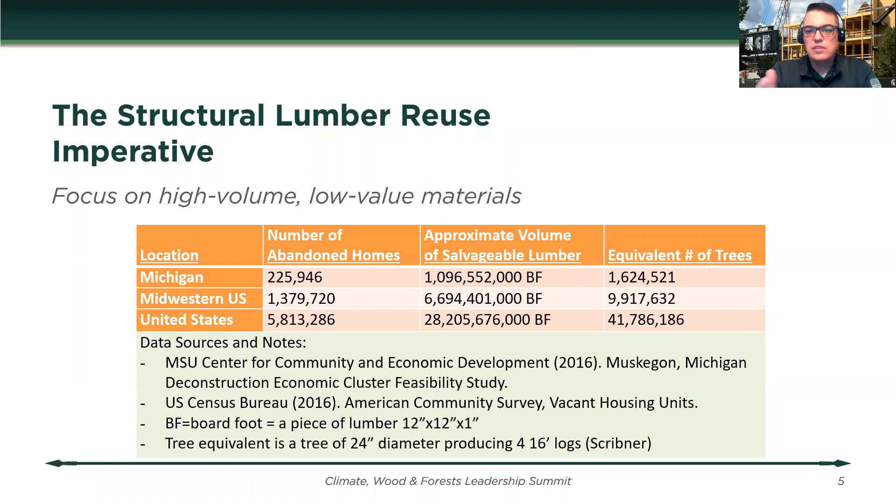So if we go back to that original table and say, okay, so we have all these homes, we have all this lumber that's just sort of sitting there that, mostly when these homes get dealt with, they're demolished and the material is landfilled. Let's look at what this amount of lumber actually equates to in more practical terms. So that 1.1 billion board feet of lumber in Michigan is functionally the equivalent of about 219 million end tables, 11 million dining room tables, 5.4 million picnic tables. And so I put these numbers there only to really sort of expose the scale of the problem. This is just the Michigan numbers.

Furniture manufacturing is something that we commonly see as a proposed higher value use for this dimensional lumber that is left behind in these homes that could be salvaged. But even if we started looking at furniture use as kind of the most appropriate or the highest and best use of this material, we're talking about furniture production that's on major league industrial scales. And really, again, the reality of how much of this can be made and how much of this can be sold starts to become questionable if we want to treat all of these abandoned structures in some way and capture that material and put it into productive reuse.

So we started thinking about industrial scale uses that would consume more of this lumber and consume it in a different way, sort of a non-end user based way. So we looked at mass timber buildings that have been put up across North America, and we said, okay, what if we could make mass timber out of this material? How many such buildings could we build? And so we looked at the Brock Commons, which is a dormitory at the University of British Columbia in Vancouver, 18 stories of timber. So if we took all of that material, turned it into 100% salvaged content cross-laminated timber and glulam, you could put up 644 Brock Commons projects.

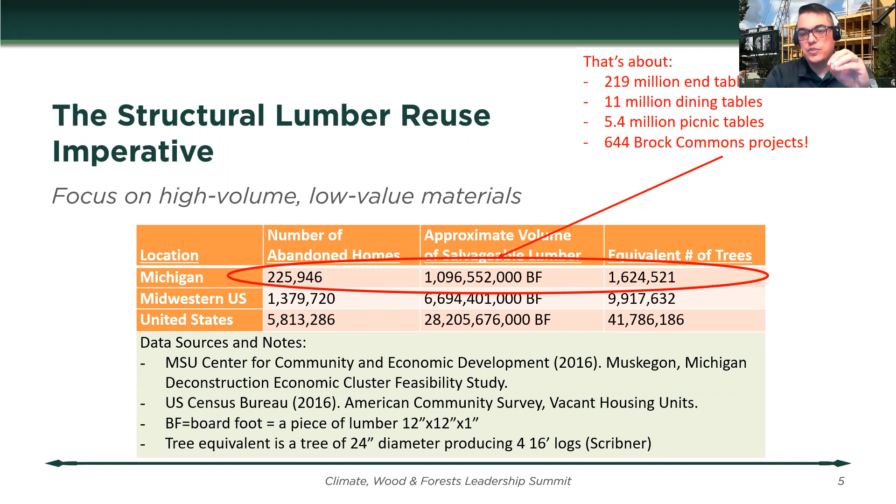If you mix virgin material with salvage source to make CLT and glulam, that number goes up, right? Maybe it goes up again by another half or another 2/3, depending on the fraction of virgin timber that we use. So this was really the moment where we said, okay, we need to think differently about how to handle this material and where it can go.

But there are significant challenges to reuse of this salvage structural lumber. First being code acceptance. None of the lumber grading agencies recognize salvaged lumber in any of their grading standards. There has been some academic and industry work that looks at what can be done with salvaged lumber and how does it grade out. And about 10, 12 years ago, there was a paper put out that said, well, if we look at the mechanical properties of salvaged lumber, they're pretty good.

So if you take a stick of salvaged lumber and it doesn't have a grade stamp on it, or you don't wish to get it regraded for future structural use, we would just downgrade it one grade on the visual grading scale. So if it graded out as a number 1 visually, then you would grade it as a number 2. So there was some move to try to get this material accepted into code, but save for some academic work, we haven't seen much come of that, except in Oregon.

Oregon has now allowed the reuse of salvaged lumber in their residential code. The limitation on what's been done in Oregon, unfortunately, is that it's only related to Doug fir and larch. And again, per what's in the code, you can take salvage Doug fir larch and just regrade it as a number 2. So again, it's usable for construction purposes, and it's usable potentially to be made into higher end products. But we're just talking about that Doug fir larch species group. So that's pretty silent on what's going on in eastern and southern species right now.

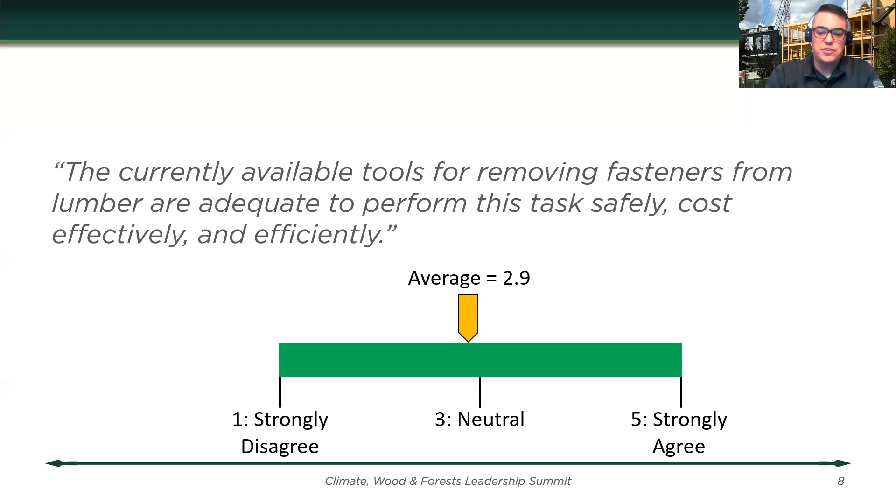And so our group said, well, this was sort of a resounding meh type of an answer, that nobody feels really strongly one way or another about currently available tools for helping to harvest and salvage and prep this material. And when we looked at 2 case study homes just here in Lansing, pretty similar homes, the one on the left was demolished, the one on the right was deconstructed. What we find is that you can demolish a house and fill the foundation in with about 40 worker hours. And that took about a day and a half of total time.

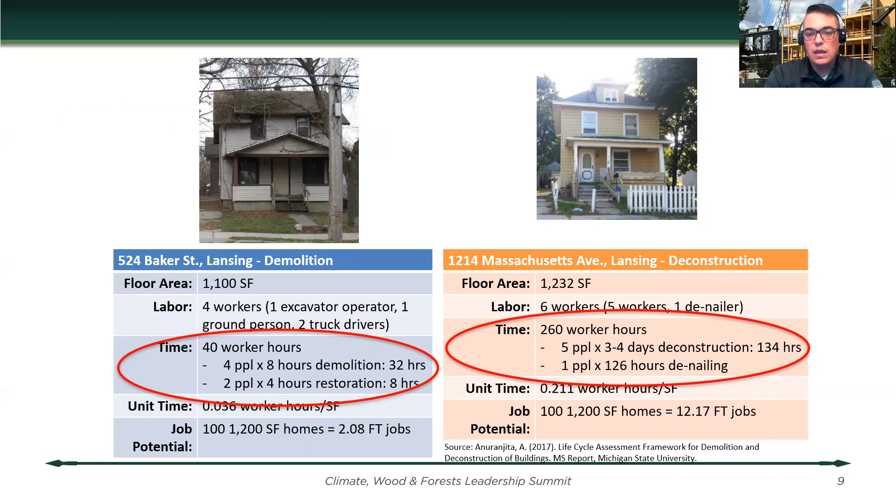But if you deconstruct a home of similar size, you're talking about 260 worker hours, basically half of which goes into the physical deconstruction, the physical removal of the structure. And then about another half of those hours is spent denailing. So just getting nails and fasteners out of the wood so that it's prepped for reuse. So this becomes a major inefficiency, a major bottleneck in the recovery process of the material before we even get into talking about supply chain and things like that.

The other issue that frankly has been hampering salvage lumber reuse has been the cost of the material by the time you go through all of this handling and all of this prep process. We did a little bit of back of the envelope calculation and found that salvage lumber costs about $833 per 1,000 board feet, and that's just to harvest it, so to collect it from the homes where it exists, and then to transport it to some point of remanufacture or reuse.

So if there's remanufacturing, that cost continues to go up from that point. If we look at the normal pricing for virgin material, and I put normal in quotes because we know that wood prices have been anything but normal since COVID-19 hit. But normally in Michigan, stumpage for softwood species is going for about $161 per 1,000 board feet. And then random length lumber futures in the Great Lakes states are going for about $457 per thousand.

So that 833 number, which is really just the harvesting, it's not any further prep. That number has just been a non-starter for a lot of different actors that are in this system, and leads to the further downplaying or the further restriction on use of this material.

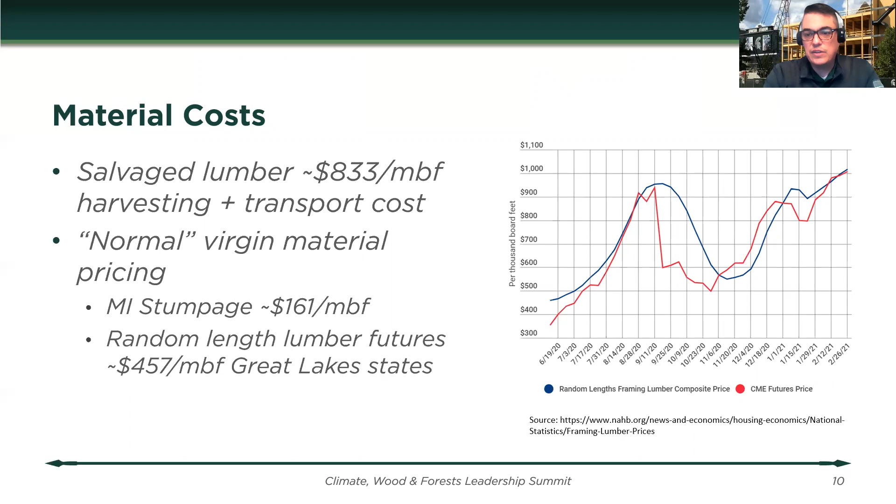But if we look at the lumber futures cost chart that we've seen in the U.S. over about the last 9 months, we know that there was a big spike last fall in lumber prices, and we're seeing that spike happening again as of late last month, with lumber prices pushing above $1,000 per thousand board feet.

So if we now start to think about where the pricing is going and how pricing is behaving on softwood lumber, maybe we can start to think about salvage material as a way to dampen some of these big swings in these markets. And so salvage supply becomes almost like a faucet that can be turned on, material that can be brought into the market to sort of dampen some of these price effects, because frankly, these prices are having a rather chilling effect on the home building industry, right.

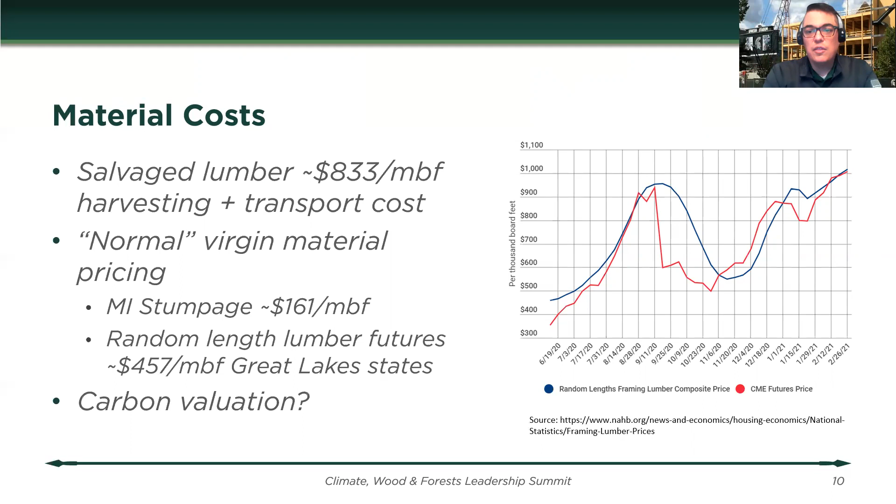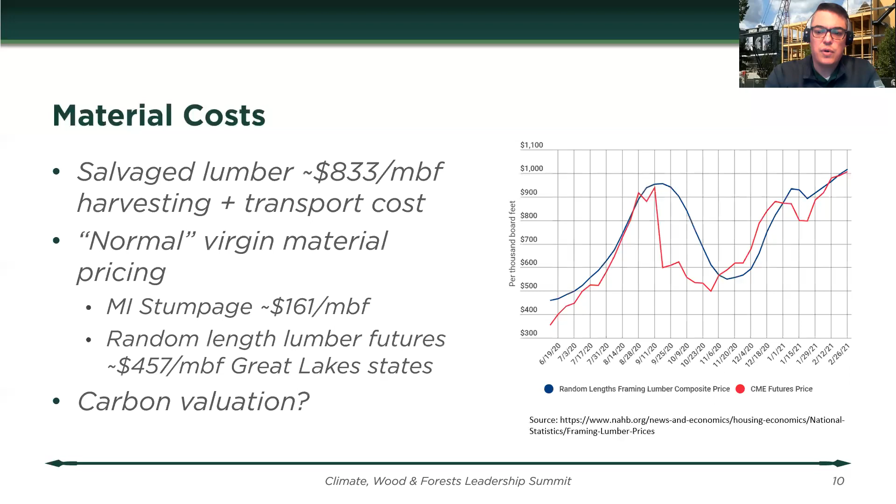The other piece that this so far has ignored is whether or not there's carbon valuation that can be attached to these materials. So if we start thinking about salvaged lumber and moving salvaged lumber through these higher use value chains, where we're moving them into long-lived wood products, now you're going to be storing carbon in those long-lived wood products for a long period of time as well. If we got into some sort of carbon regulatory scenario, carbon credit trading scenario, there may be additional value for this material to again offset some of those higher preparation costs for the material.

So we've done some work at MSU towards solving some of these challenges that were raised. The first is that we've been looking at mechanical properties of southern and eastern spruce pine fir species. So we've been taking some material from some homes that were deconstructed in Michigan. And again, it was primarily southern and eastern species. We've just been grouping it because of the mix that we've been getting into the SPF category.

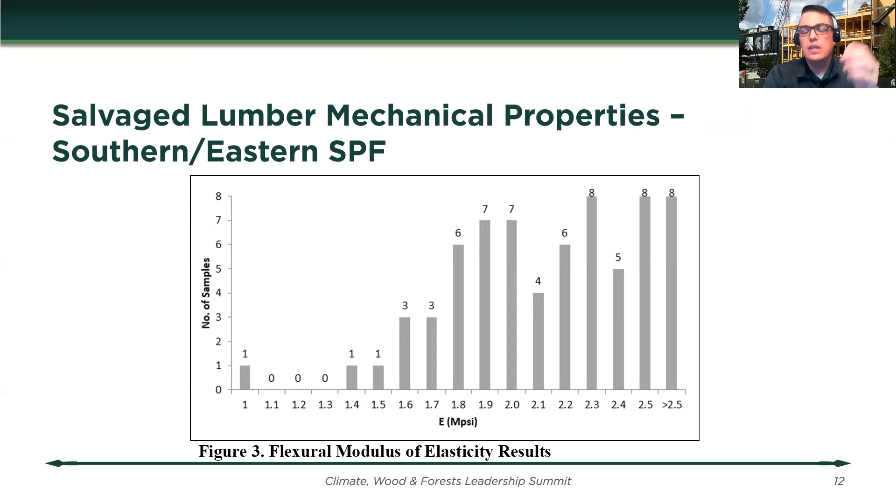And you can see here that based on modulus of elasticity, where normally you're looking for numbers somewhere in the 1.2, 1.3 million to look at what might grade out reasonably well for future use as construction lumber, you can see that in this group of I think 68 samples, really 67 have hit that mark. One sample did not. So from the first pass, we looked at our data and we said, this material, there's something to it in terms of its suitability for future use in these higher value applications.

And then we looked at specifically the entry grades for making CLT and for glulam. And we found that in 5 of the 6 commonly encountered entry grades for CLT, over 90% of our samples that we've run pass to be used as feedstock for manufacturing CLT.

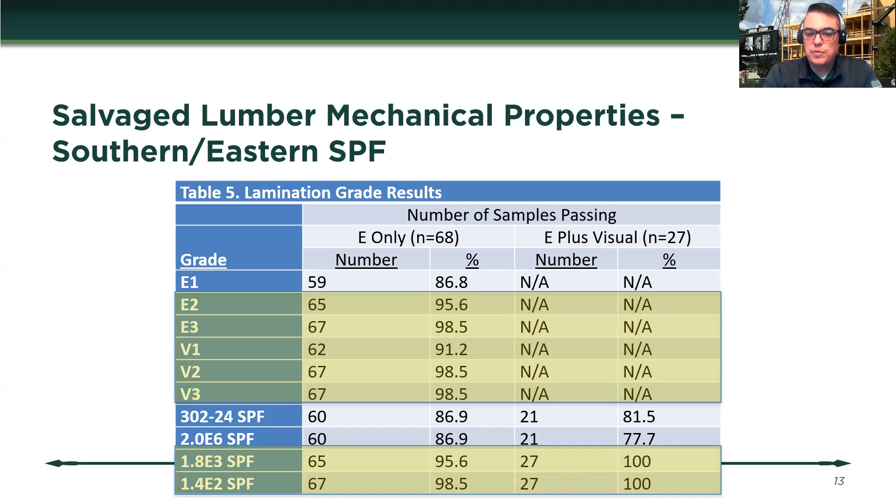And then we looked at glulam entry grades for laminations. And again, we found that in one specific grade of glulam, 2 of the 4 laminations that are required to make those glulams, we had greater than 90% of our samples pass. So now our next step is to actually make panels, to make glulams, and start to test those structurally. But right now, at least the entry grades of the material appear promising to be used in that application down the line.

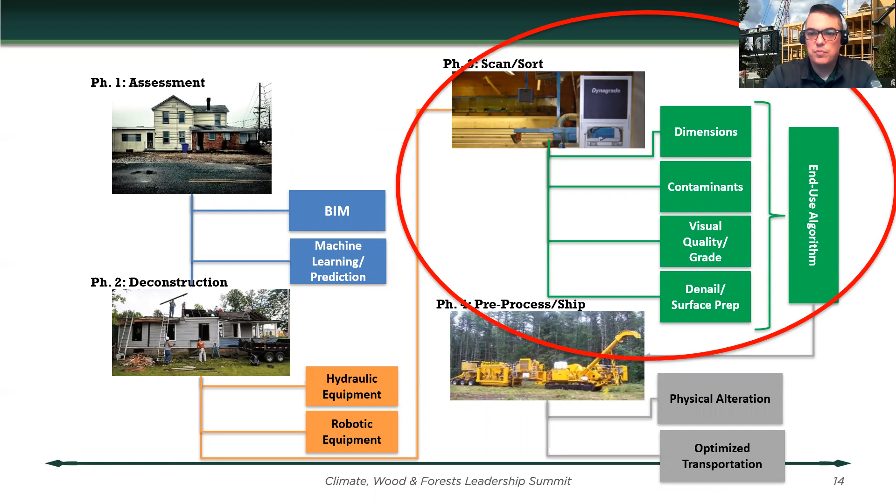The other side of the work that we've been doing is getting at some of that time, cost, efficiency, and supply chain concerns. So we've been looking at where automation can start to come into this process. And so we've really been focusing on scanning and sorting of material and how automation can improve efficiency on that side of the operation.

And so we've had some students that have developed requirements analyses by taking sort of the human activity to scan and sort and prep salvaged lumber and turn it into a series of computer instructions. So we have that going on.

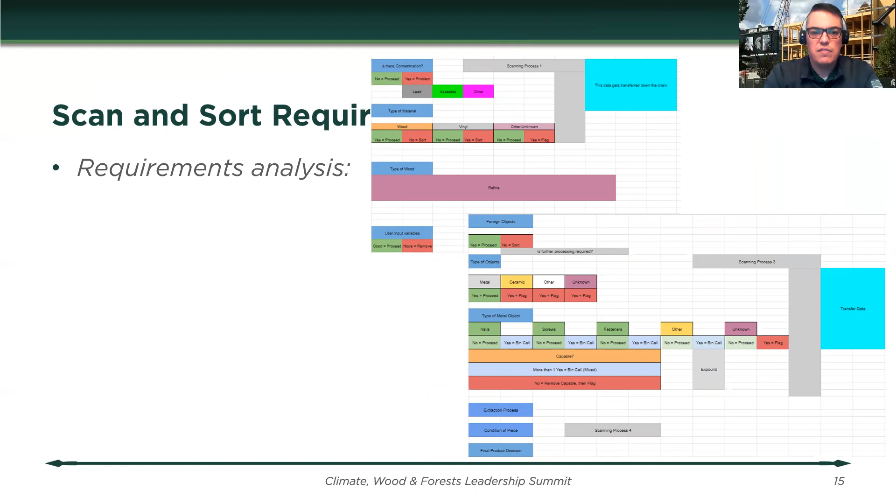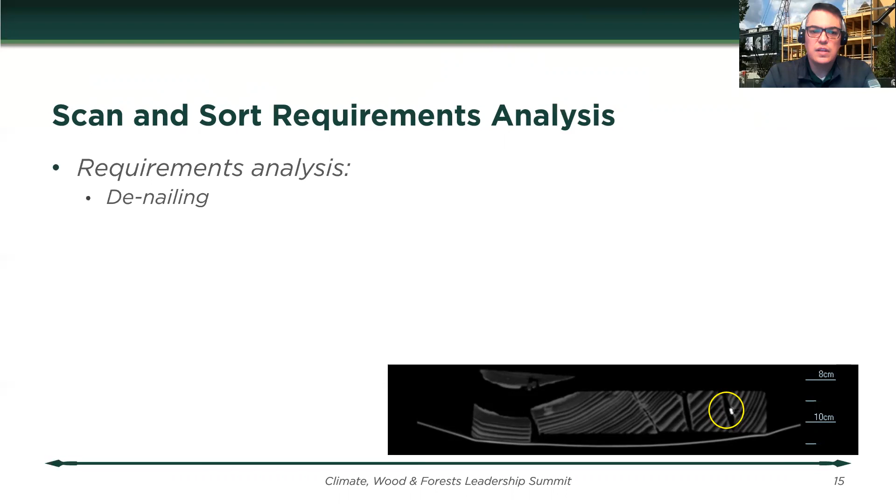We've then done some imaging work to look at, can we detect nails, screws, any other kind of fastener, even when they're buried inside of the lumber, so when there's no obvious indicator on the surface of these materials. We've also been asked through that same national survey, could we do a better job of helping to identify surface contaminants like lead-based paint? Could we develop a system that could help visually grade lumber in a more automated fashion? Could we dimension it?

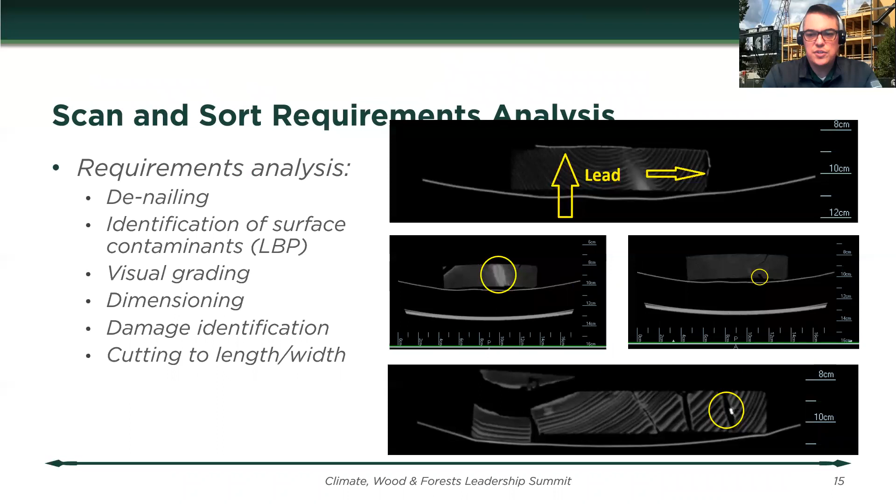And then could we identify other damage? So things like checks, splits, rot, fire damage, insect damage. And then ultimately, could we cut material to length and width based on understanding what the nature and the quality of the material looks like, and then tag it and inventory it with its requisite properties that were discovered through that scanning and sorting process.

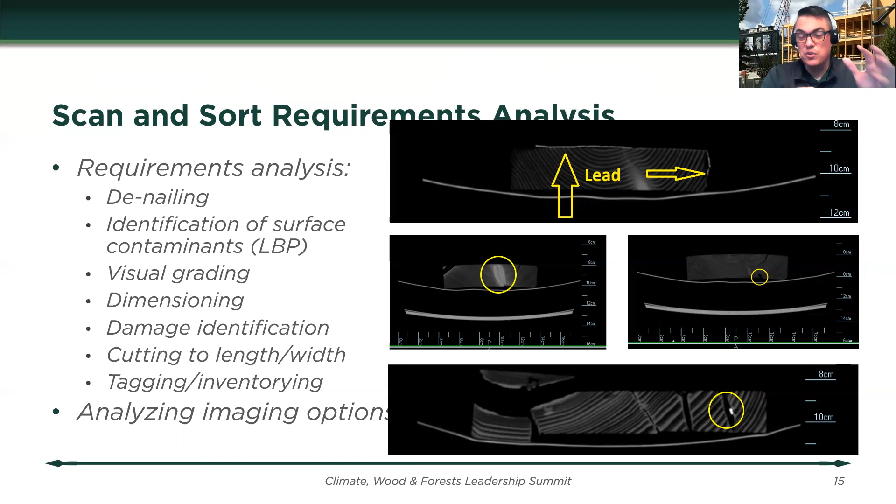So we've been analyzing some imaging options. This was all done with CT scanning, obviously not really cost effective, not something that's easily deployable to multiple locations. But again, we were just playing around with what imaging options exist, what imaging options can give us in terms of these requirements. And so this was kind of a first pass looking at CT. We're really settling in on things like computer vision to help us instead with some of this operation.

And then as we move out of that scan and sort, we're at the point now where we're looking to make some prototypes, and we're looking for some funding from external sources, from some incubator sources at MSU and other places to make a functioning prototype.

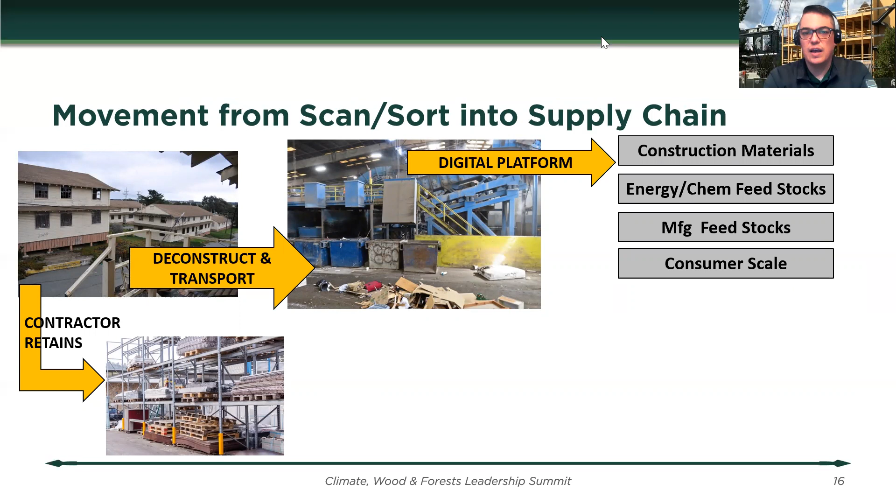And then what products exist at a consumer scale that could just be sold directly to consumers. So if those first three gray boxes are more like B2B type connections, that last one would be direct sale back to consumers. For material that's retained internally by contractors, as well as that externally facing material, the idea is that we then create this network of what's available.

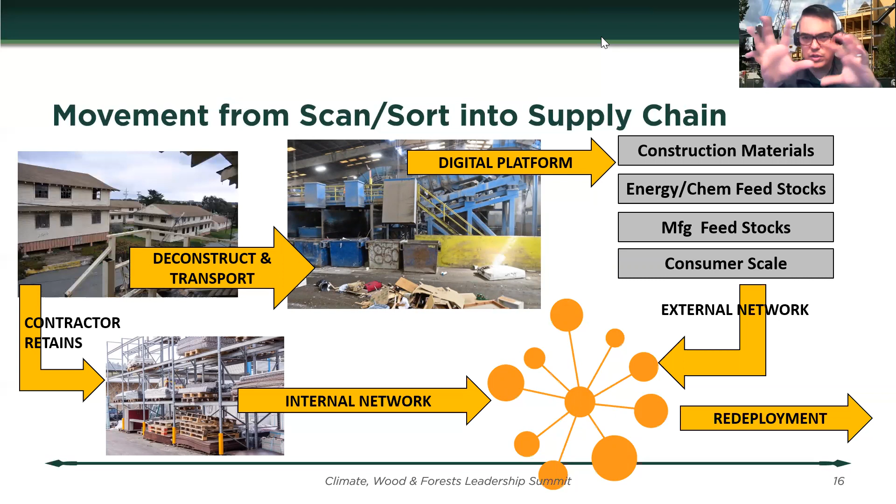End users can tap into these networks based on what they need to see what's available, where is it, they can arrange shipping for those materials, et cetera, with the end goal of ultimately redeploying this material. So whether it's going to be redeployed directly, direct reuse, or redeployed in some remanufacturing scenario, this is other work that we're starting to put some thought behind at MSU right now.